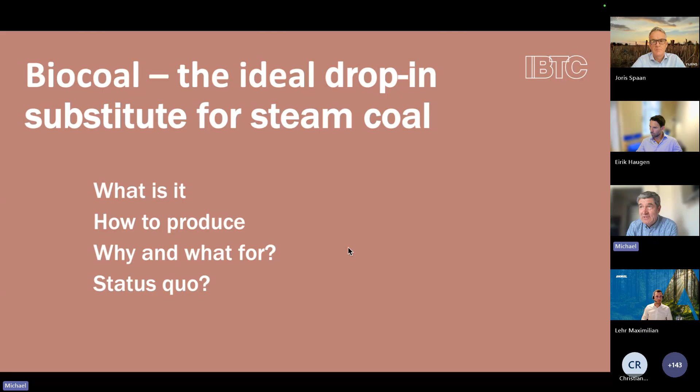For today, what am I going to talk about? I'm taking the role of introducing you briefly to what is biocoal, what is it made from, which processes do exist, what for can we use it, why are we building it, and then also give you a short update on the general status quo before handing over to some of our members. They represent then their individual approach to the market and their individual success stories already.

Now, what is it we are talking about? We all know coal is present, and coal is in reality made out of biomass. In many million of years, this is made. I mean, if we talk about peat, it's maybe only a couple of million years, but if you talk about lignite or subbituminous coal, we're talking about a couple of 100 millions, and anthracite takes about 400 million years.

Now, the overall clue in our technologies and our approaches is that we do the same thing, but much faster. We work in a couple of minutes, doing the full carbonization curve that usually biomass goes through under pressure and temperature when it's under the Earth. Along these process chains, we have a couple of process names.

Every time we are applying heat to the biomass, we not only eliminate the water content, but we also eliminate some of the volatiles content of the fresh and dry biomass.

As the first process step, we see steam explosion, which makes the lowest calorific value but still very high quality product. Only a small proportion of the volatiles is evaporated.

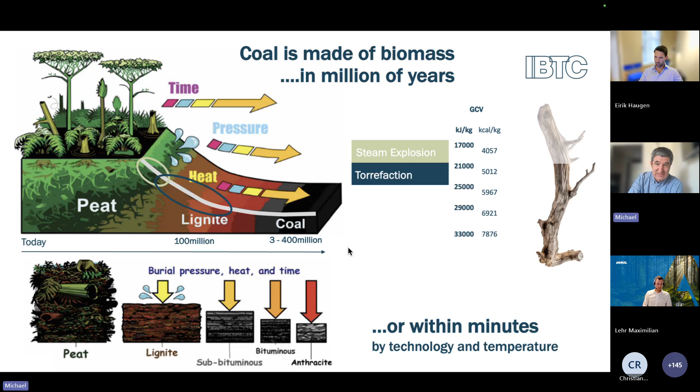And the higher we go in this process, we have further names: pyrolysis, carbonization, charring. These are all processes where more of the volatile matter in the biomass is evaporated, and the more the carbon is condensed, the higher the calorific value of the product, and the higher also the value of the product for other purposes than energy applications.

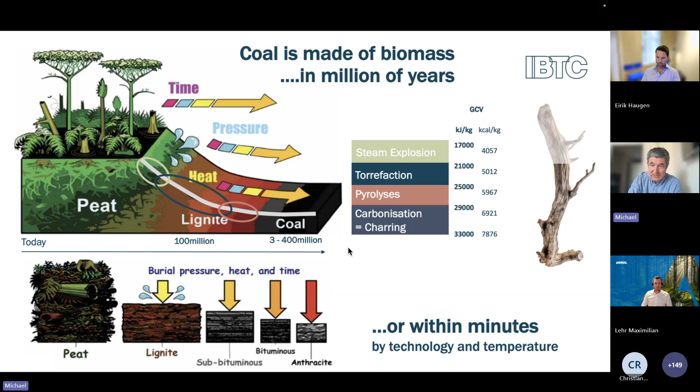Today, we are looking into the energy applications. We will have another webinar together with WBA on non-energy utilization of these materials, but here we are looking into thermal applications.

When starting to present these processes, especially in the financial community or other areas, I'm always asked, is this a mature technology already, or is this a novel thing? You may remember what brought us from Bronze Age to Iron Age—6,000 years ago, we developed charring processes, and we developed all the metallurgy out of those charring processes. So actually, there's hardly any technology or product with such a maturity and such a long-lasting success story.

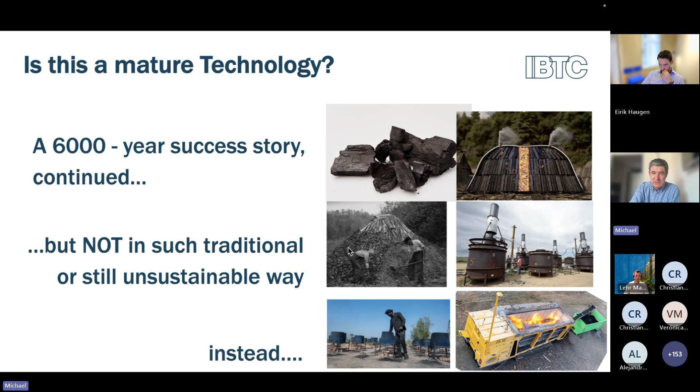However, what differentiates today's processes from previous ones? In previous processes, all the gases were just evaporated and emitted. That's a huge emission, a huge loss, but also a poisonous thing. So what differentiates us today from the past?

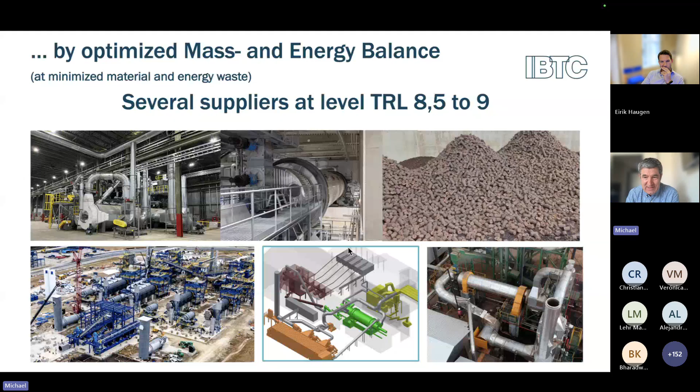What differentiates us from the past is that our installations are completely integrated, and no molecule is really wasted. We typically use all kinds of biomass feedstocks—we can use woody biomass, but also grasses, straws, shells, nutshells, or whatever.

Everything goes through an adjusted thermal process, then is upgraded, leading to products that, at the very end—after torrefaction or steam explosion—are fluffy matter that, for storage and transportation, needs to be agglomerated.

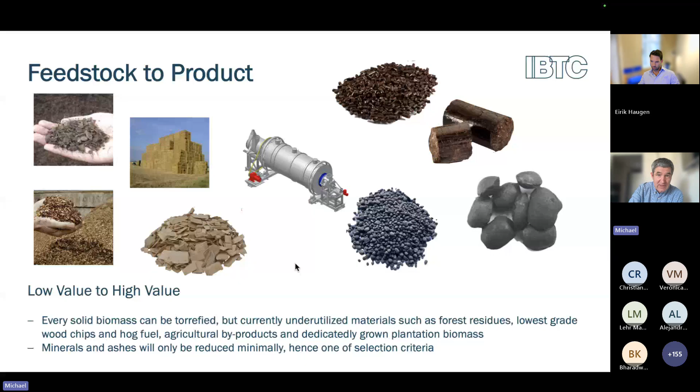We typically have a setup of a processing plant that is very similar to a standard pellet plant, where first you dry the biomass, whatever biomass it is, and then you go into a torrefaction reactor, which is the only difference from a pellet plant.

Here we have a superheater or super dryer that is typically operated at probably 200 to 300 degrees C, or a unit that does steam explosion activities, which you'll also be introduced to in parallel. However, out of this thermal treatment process, we get material that needs to be densified.

Is there only one way of applying heat to biomass? No, by far not—there are many different ways. As you can imagine, when you want to get your glass of water warm in your kitchen, you also have different means of applying heat—you can use the microwave, a cooking pan, or an oven.

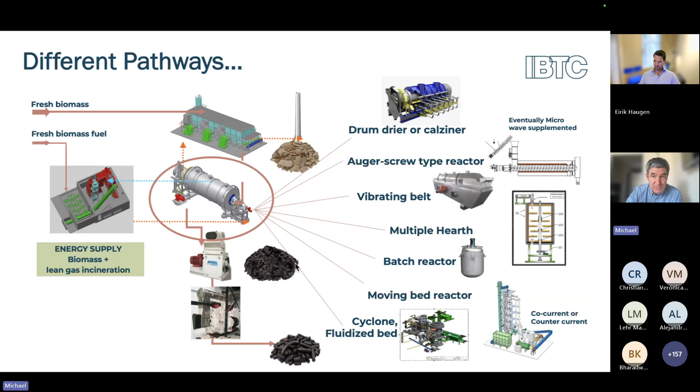So also here, in applying heat to biomass, we have all kinds of different technologies: rotary drums, auger screws, vibrating belts, multiple hearth reactors, some batch reactors, moving bed reactors, or circulating fluidized bed reactors. And we have steam explosion, with a separate line of machinery you'll be introduced to.

So what is the process level we are talking about here? We are talking, at the moment, in torrefaction about a process that applies heat to the biomass at about 250 to 320 degrees C, evaporating roughly 30% of the input dry mass in the form of syngas. This syngas is composed of carbon monoxide, hydrogen, and some long chain molecules, and it also contains energy.

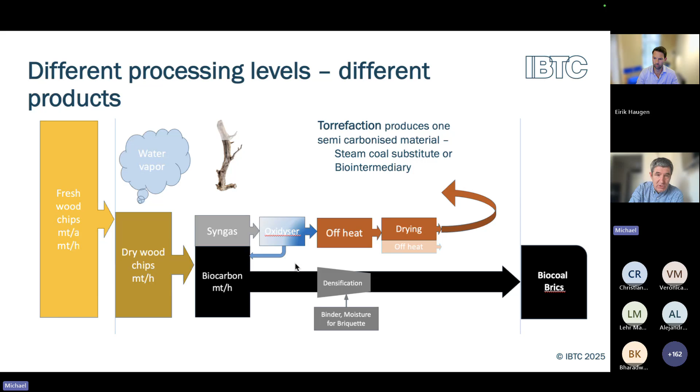In a typical torrefaction process, you would reduce your mass by about 30%, but only 15% of your original energy would end up as syngas. The best set point for a production line of torrefied material is when this becomes an autothermal process, meaning the syngases are combusted in an oxidizer, and this heat is used for the torrefaction process and for drying the raw biomass. That would be an ideal set point, and in such a set point, the mass and energy balance of a torrefaction plant is almost identical to a whitewood pellet plant.

What kind of products come from the carbonization and torrefaction processes? To clarify a little, we are speaking today about biocoal. Biocoal is a low devolatilization product. The calorific value is between 19 and 20 on dry basis, can go up to 23 probably also, and will have a fixed carbon of not more than 25%. The total carbon will be 60% or so.

This product is usually the ideal drop-in substitute for steam coal. So in power plants, the power plant digests biocoal as well as it digests normal coal. But this material is also the ideal input for all kinds of gasification processes, since it is so brittle that you can grind it up to talcum-like powder very easily. So then you ease the gasification, and by this also all the liquefaction afterwards.

If we go further up this curve, as you remember from the beginning of my presentation, we will end up with biochar or biocarbon materials that are used for sequestration of carbon or for other industrial purposes, like the decarbonization and defossilization of the metallurgical industry.

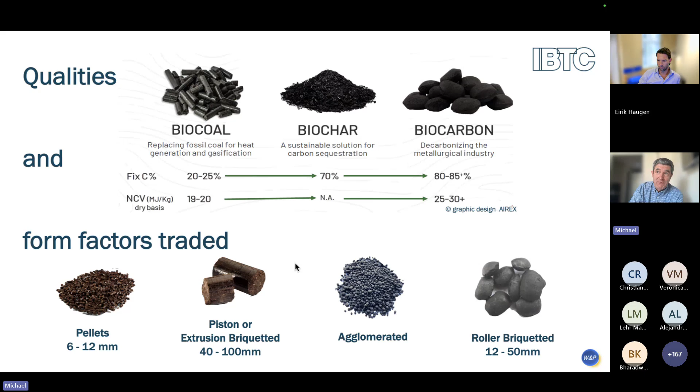We see roller briquettes, mostly for higher carbonized material, and especially for biochar, we sometimes see agglomerated materials, meaning snowball-like materials that don't have a very high bulk density. When we produce these products properly, in pellets or briquettes, we can reach bulk densities of about 720 to 750 kilograms per cubic meter, reducing shipping costs versus other biomasses significantly.

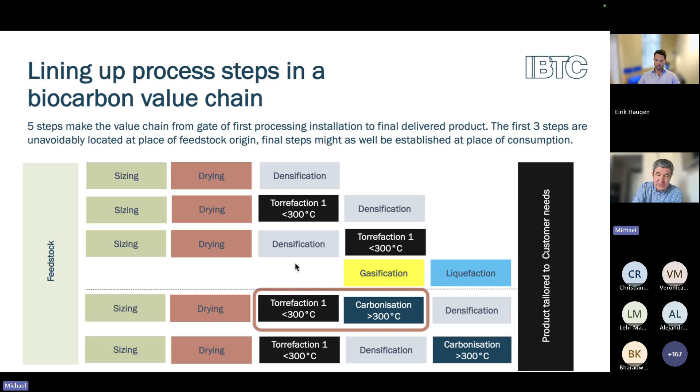I spoke before about the typical process setup, which is the same as a standard whitewood pellet plant: sizing, drying first, then thermal treatment, and then densification. There are now, especially in Asia, first projects that turn it around a little, doing densification first — so pelleting — and then torrefaction. Whatever the customer wants, the processor is willing to set up. Both have their pros and cons, which we can discuss later if of interest.

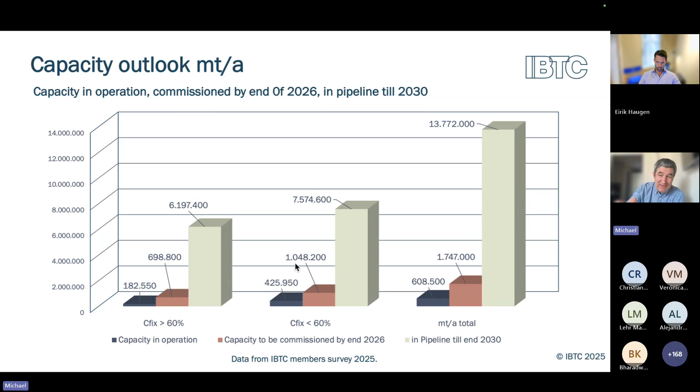This is just a survey from the members of the IBTC, so these numbers do not cover all the companies that are not organized in the IBTC. I need to admit there are a couple not yet organized with us. If you're present, please understand this as an invitation to join us.

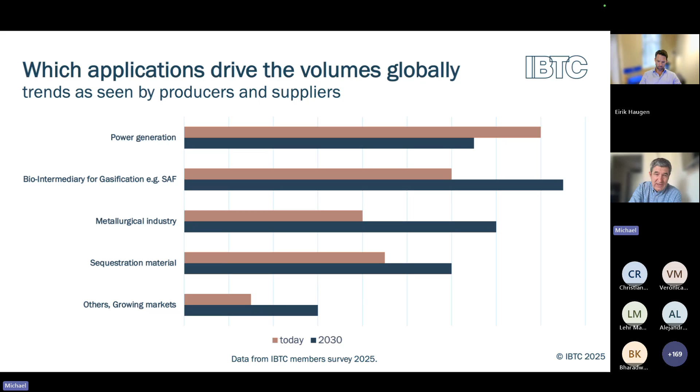The products will go mostly at the moment to the power generation sector, but we see more and more of these materials taken up as a bio-intermediary, as feedstock for further processing, like SAF production or further upgrading at a later stage. So torrefied material, steam exploded material, could be seen as a global commodity used as feedstock for all kinds of further processes, including power generation, but also more sophisticated processes that might supply the metallurgical industry, be used as sequestration material, and growing markets like anodes and further applications.

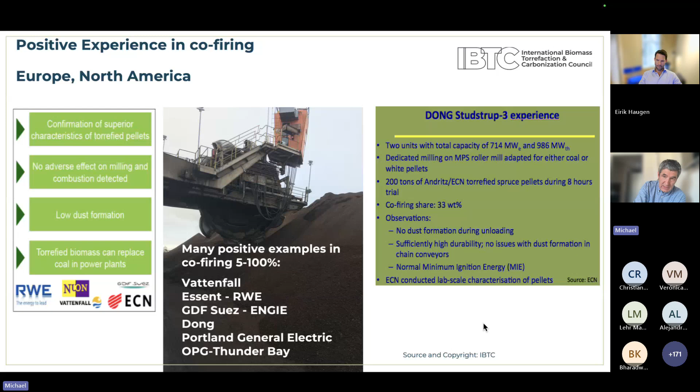Here are a couple of experiences which we had in the power industry. Started out actually in Europe, but then we had a couple of projects in North America, like Portland General Electric and OPG Thunder Bay. There is currently also a very large project in Canada announced: Belledune power plant will be converted to thermally treated pellets and upgraded.

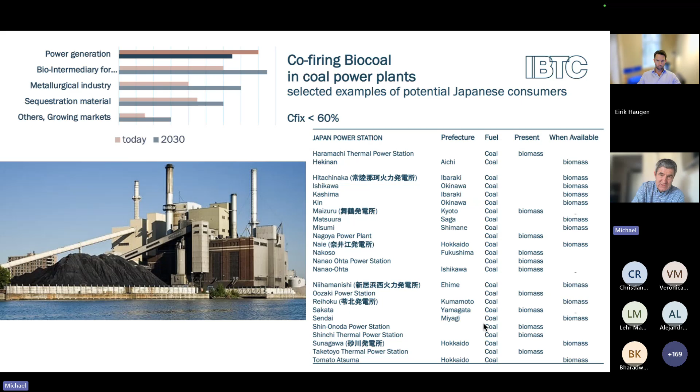And we see also that this is not only an effect in Europe and in North America. This is also very, very common by now already in Japan, where a lot of the coal power plants are using standard biomass for co-firing and are switching now step by step into torrefied biomass, because that simply eases their conversion process so significantly.

In conclusion, and to sum up here, our products are really known to the market, and this is a long success story of these products. We have in the last two decades established processes with a real optimized mass and energy balance, meaning there is minimized material and energy waste. Literally every molecule into the process is used in the process and creating some value through the process.

Circular biocarbon, biocoal is absolutely the easiest and cheapest way to substitute fossil coal, and not only in power applications, but in many other applications as well. So defossilization with biomass and with thermally treated biomass is significantly cheaper than ammonia, than hydrogen, or whatever pathway you would look into. While we have today mostly energy coal that we substitute, we are foreseeing that much more product will go into others, especially in the liquid and in the SAF market.

We know from the projects that are currently implemented that if there is a sustainable feedstock secured at reasonable costs, the projects that are implemented at the moment are really offering very appealing project IRRs. And the beauty of the situation at the moment is there is not only one technology producer, there's a couple of technology providers on the market in a very healthy and fruitful competition, leading to a number of different projects. Also for the consumers, the advantage is that they don't have to put all their eggs into one basket, but they can really diversify also their basis of supply.

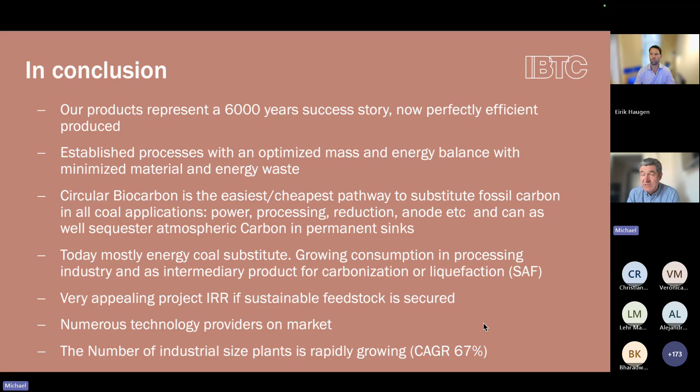As said, we foresee that the whole industry in biocoal will have a compound annual growth rate of somewhere between 60 and 70%, and by this will be one of the fastest industries growing at the moment.

But the question is now, what are actually the principles behind steam explosion and torrefaction? Michael explained it already, I will try to explain it also with slightly different words. Let's have a look behind the scenes at how the magic works.

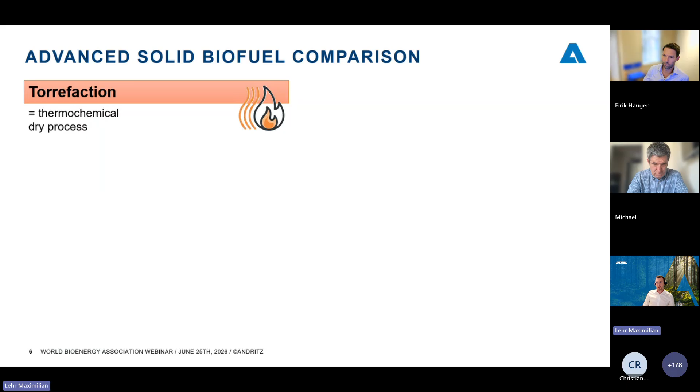I want to start with torrefaction. Torrefaction is a dry thermochemical process. This means lignocellulosic biomass is heated in an oxygen-free atmosphere to around 250 to 330 degrees Celsius. That causes the hemicelluloses and part of the lignin to decompose, releasing so-called torrgas. The resulting torrefied material has improved fuel characteristics, for example high calorific value and high fixed carbon content.

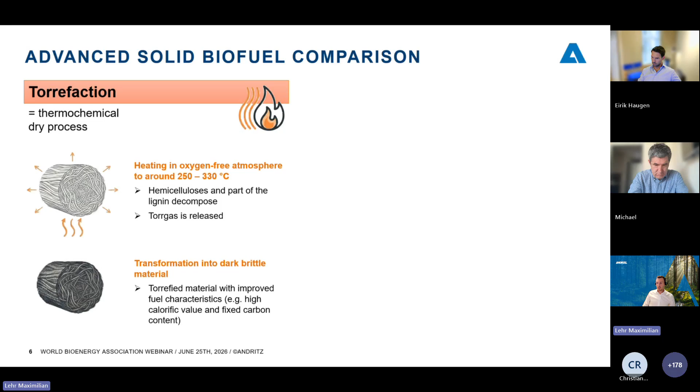Steam explosion, on the other hand, is a wet process - actually a wet mechanical, physical, thermochemical process. This means that the lignocellulosic biomass is heated up in a pressurized atmosphere with steam to around 200 to 215 degrees Celsius.

This leads to a partial conversion of the hemicelluloses into different degradation products like acetic acid and furfural. Lignin, on the other hand, is softened and partly melts. All the steam injected into the reactor condenses inside the capillary structure of the lignocellulosic biomass.

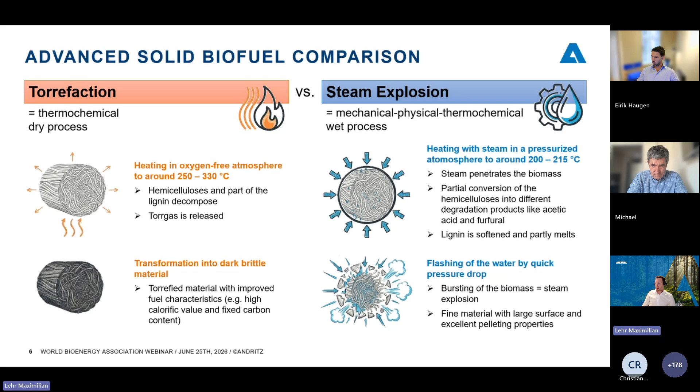After a certain retention time, the biomass is continuously discharged, and a quick pressure drop causes all the water inside this capillary structure to rapidly flash and expand, causing the lignocellulosic feedstock to burst, resulting in fine powder. The lignin is precipitated on this powder particle surface and acts as a binder during pelleting.

You may have already asked yourself, why do we as Andritz offer both steam explosion and torrefaction, and what's the better technology? Well, the unsatisfactory answer is: it depends, and it really depends on many factors.

As you can see with this table, there are various differences in the product properties between steam explosion pellets and torrefied material. For example, the calorific value, fixed carbon content, durability, pelleting properties, and so on.

To simplify it a bit, if you're just looking for a drop-in fuel for coal-fired heat and power plants, steam explosion might be the better technology, but for the steel and cement industry, you will need torrefied material because of the higher fixed carbon content.

Unfortunately, it's not that easy. There are also various project or site-specific parameters that can play a role. For example, you may already have a steam boiler on site, or have a demand for waste heat, and so on. So as you can imagine, for every project there is a different, better technology.

Our advantage as Andritz, since we offer both steam explosion and torrefaction, is that we are quite technology agnostic and always find the best solution for every project.

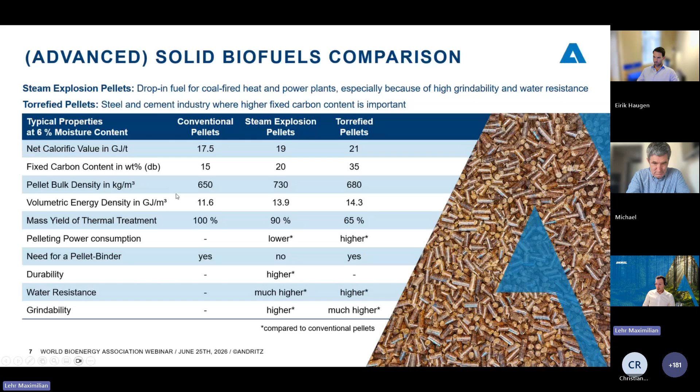This best solution can be, for example, simply pelleting to produce white or conventional pellets, or if you want to directly replace coal, steam explosion or torrefaction to produce advanced solid biofuels.

We as Andritz also look beyond advanced solid biofuels. Steam explosion powder or torrefied material can also be used as feedstock for gasification to produce syngas. This syngas then, as Michael already explained, serves as a platform for various syntheses to produce biochemicals and biofuels, for example sustainable aviation fuel.

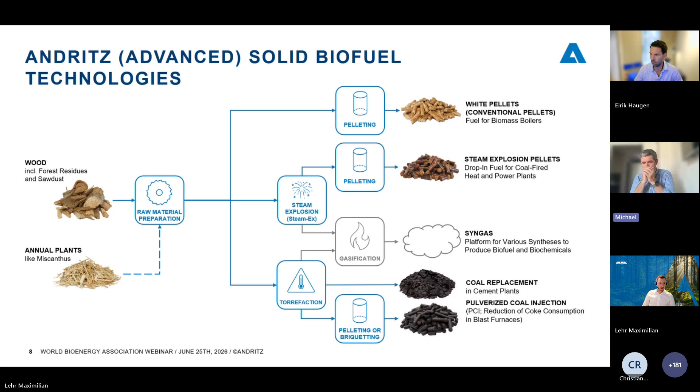But for this webinar today, I would like to focus on advanced solid biofuels. So the question is, how do these processes actually look in more detail? I'd like to start with steam explosion.

Our Andritz steam explosion technology, or Steam-Ex technology as we call it, starts with biomass handling and preparation. In the case of woody biomass, for example, debarking and chipping. Depending on the process parameters and options, the chipped biomass can also be hammer milled and optionally pre-dried before entering the Steam-Ex core process.

In this Steam-Ex core process, the lignocellulosic biomass is converted into steam explosion powder, as I already explained, and this powder is then pelleted into steam explosion pellets.

All the vapors or waste steam are condensed, cleaned, and purified in order to close the water loop and recycle all the water. Here we work together with Sulzer Chemtech, which allows us to efficiently treat the Steam-Ex vapors and close the water loop, and optionally also fractionate the resulting hemicellulose degradation products to utilize them as valuable biochemical byproducts, for example furfural and acetic acid.

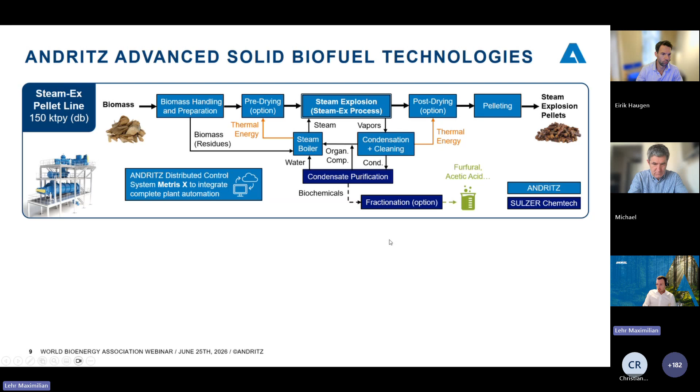The second advanced solid biofuel technology we have in our product portfolio is torrefaction. Similar to steam explosion, the first step is biomass handling and preparation. Woody biomass is debarked and chipped, but does not need to be hammer milled.

A key advantage of our torrefaction process is that waste wood can also be used as feedstock. In these cases, we can deliver the entire waste wood processing line using our Andritz recycling equipment.

After preparing the raw material, it is dried and then fed into our dedicated torrefaction reactor, where it is transformed into torrefied material. This torrefied material can then be further densified by briquetting or pelleting.

The resulting torrgas is utilized in our dedicated combustion chamber, and the resulting hot flue gas then provides thermal energy for the torrefaction reactor and the drying.

Since torrefaction usually generates more energy, more heat than it consumes, the surplus heat can be exported as hot water or steam when combined with a steam boiler.

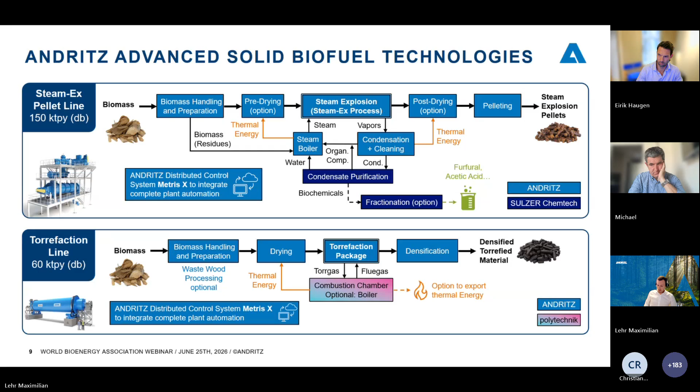Also, Airex is using our Andritz technology to produce advanced solid biofuels. Our pellet mill has been in operation already since 2016, continuously producing 2 tons of biocoal pellets per hour.

And we are continuing to develop advanced solid biofuel densification solutions alongside the front end, steam explosion, and torrefaction. This clearly shows that we are eager to take on any challenge to develop the right advanced solid biofuel solution to meet the market demand.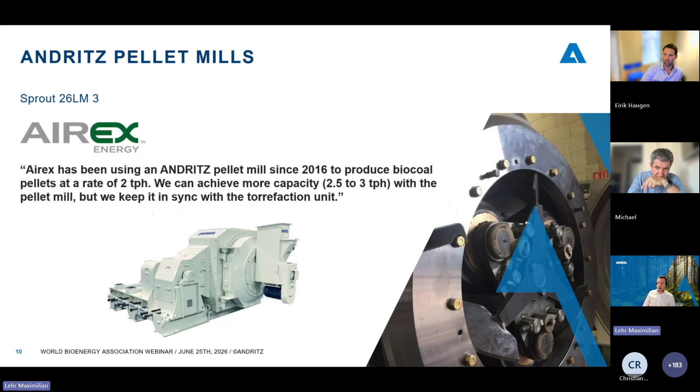That's actually the reason why we have focused on agricultural residues with our leaching process. I already presented the different pathways to produce solid and advanced solid biofuels from woody biomass and some annual plants.

Agricultural residues cannot be directly used to produce solid and advanced solid biofuels because their high ash and mineral content leads to severe issues like corrosion and wear during biofuel production, such as pelleting, and also slagging, fouling, and corrosion during combustion in industrial combustion systems.

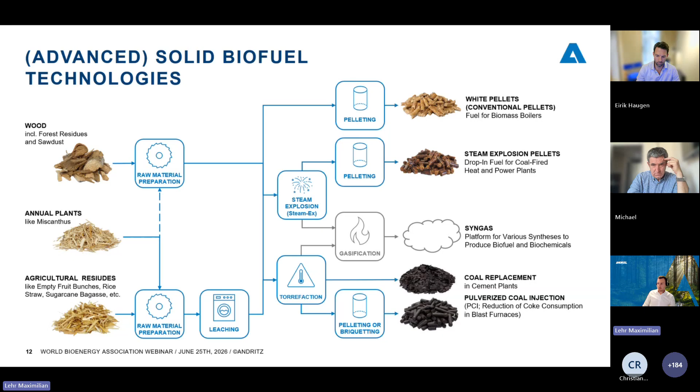With our leaching process, we can finally unlock the potential of agricultural residues by significantly reducing this high ash and mineral content. How does this work? Here you can see a schematic layout of our leaching process, which is basically based on our well-proven pulp and paper and environment and energy equipment.

Sand, stones and other heavy impurities like metal pieces are separated from the biomass, and all the soluble elements, for example potassium, sodium, and chloride, are extracted from the biomass.

The resulting wastewater, or leachate as we call it, containing all these minerals, can then be optionally treated to minimize water consumption and reduce wastewater production, and ensures it aligns perfectly with all the environmental legislation.

The resulting leached biomass is of course much less corrosive and less wear intensive, which especially ensures smoother pelleting, and of course we meet all the stringent biofuel specifications and ensure cleaner combustion.

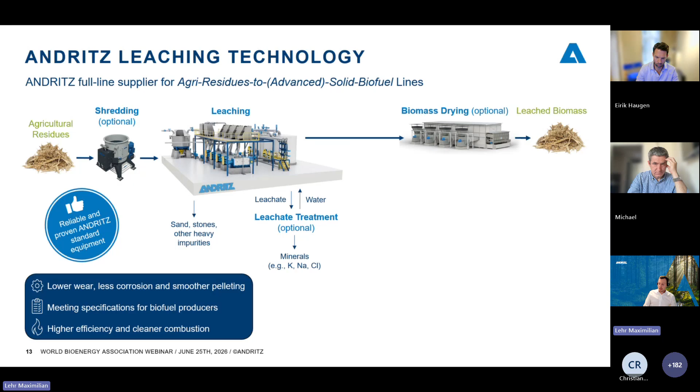Our leaching process can of course also be combined with our technologies for biomass drying and also steam explosion and torrefaction for complete lines to transform low-value agricultural residues into high-value advanced solid biofuels.

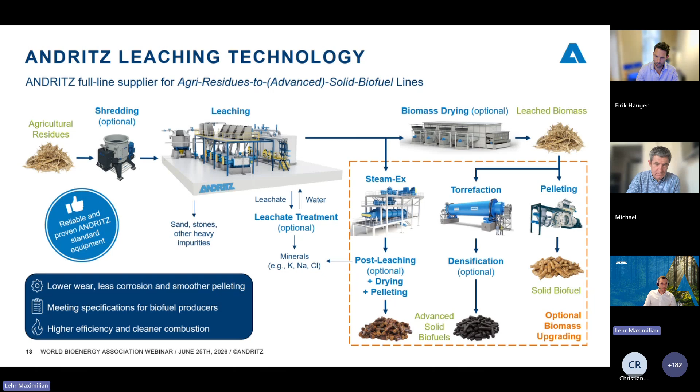And this is not just a concept I present you today, it is actually reality. With Andritz key equipment in the world's first commercial scale empty fruit bunch Steam-Ex pellet plant, powered by Rainbow Pellet in Malaysia, this plant consists of leaching and Steam-Ex technology and was designed as a multi-feedstock plant, able to use empty fruit bunches alongside other palm oil residues as well as wood.

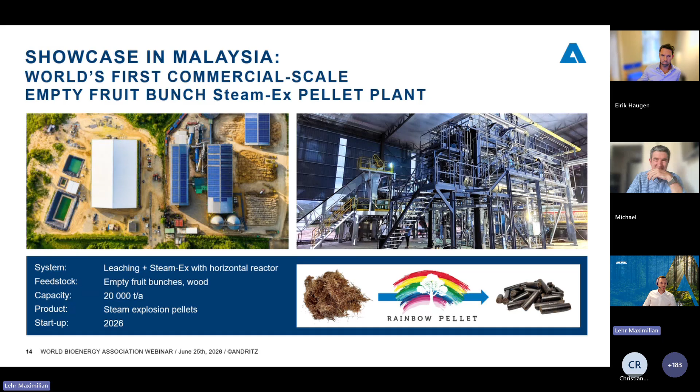We have successfully started up this plant just this spring, but please be aware this plant is just the beginning, so ladies and gentlemen, please stay tuned. But now I would like to thank you for your attention, and I'm already looking forward to your questions.

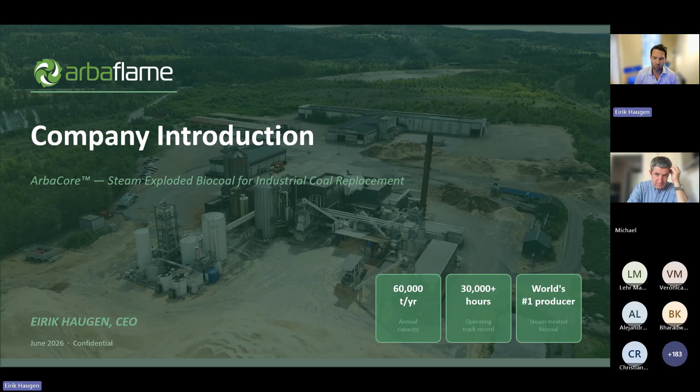Thank you, Michael, for the kind introduction, and to WBA and IBTC for facilitating the webinar. I'll give you a quick introduction to where we are at Arbaflame at the moment, as we now have close to 4 years of operational experience from our first commercial plant, Arbaflame in Norway. Before that, we also had a smaller scale pilot plant. So now we would say that we're definitely up to technology readiness level 9, and based on the long list of lessons learned we have, we are definitely at a stage where we can scale further.

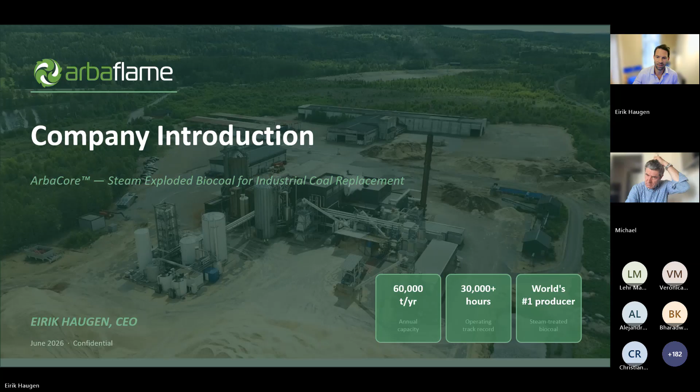We also, in our process from the condensates, produce other biochemicals, including furfural, biogas from the wastewater treatment, biomethanol, and acetone. So we actually regenerate about one-third of the energy in the process from byproducts.

In addition, last year we got Pearl Infrastructure Capital on board, which recognized that our technology has reached a point where we can go from small scale into a scale-up mode, and we are part of their second fund. We also now have a French sister in the portfolio, FICAP in France. So altogether, we have a total capacity of about 180,000 tons yearly.

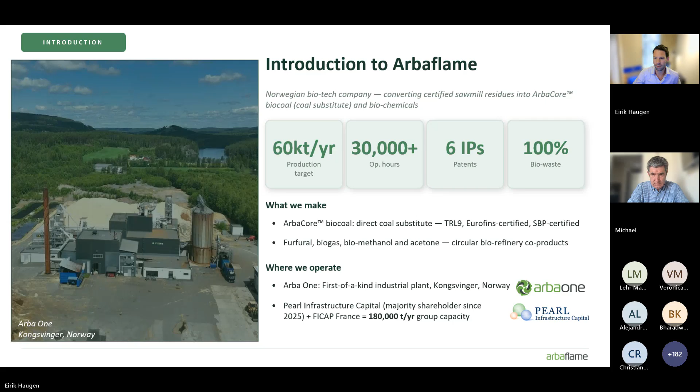Just a quick highlight of the market. The coal market is enormous, and the biocoal market, like Michael said, is not a new technology, but still biocoal production is in the early stages and yet scaling up quickly. The addressable market is enormous, and we're not trying to replace all coal in the world, definitely not. But really to target where it makes the most sense, where it's the most difficult to find alternative solutions, and where it's a direct drop-in substitute for coal.

So basically, it's not yet a commodity market. It requires qualification, and as we are operating in a highly conservative business, we often see, based on our 35 tests at various industrial sites in large scale, that from the first kind of little sample until full-scale operations, it's a long process.

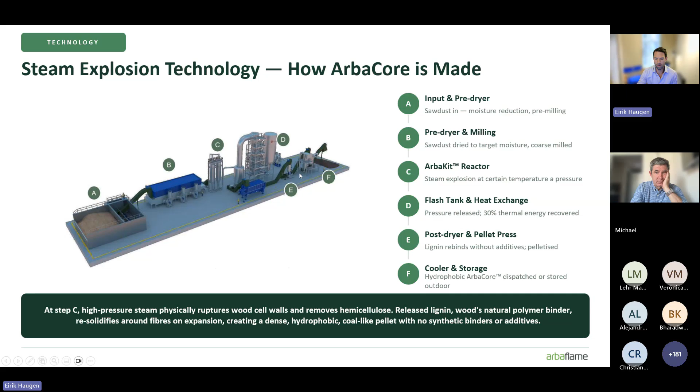So we pressure up to a certain level. We hold it for a number of minutes, and when we release the pressure in the reactor, that's when the magic happens, and the biomass defibrates and is blown into the flash tank where we separate the gas and the biomass. The gas is condensated and taken to our biorefinery, while the biomass is dried down to the right moisture level for pelletization and then off to market.

The product itself was originally designed for ultra-critical coal-fired power plants, so it's very fine particles. Bulk density of about 750 kilos per cubic meter, and calorific value of about 5.2. Moisture 8%. It's high on durability, and the particle size is extremely fine.

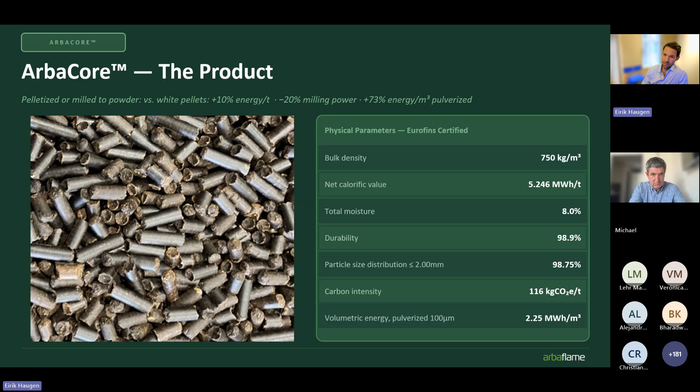So most of the use is intended for combustion as powder after milling. We see that due to the fine particle size, the volumetric energy in the powder is extremely high, about 70% higher than conventional white pellets.

When comparing against other alternatives, again, we are a drop-in replacement of coal. We're not really trying to compete with white pellets, where the investments in the required infrastructure is already made. But we have really mirrored the physical properties of coal, in a climate positive product.

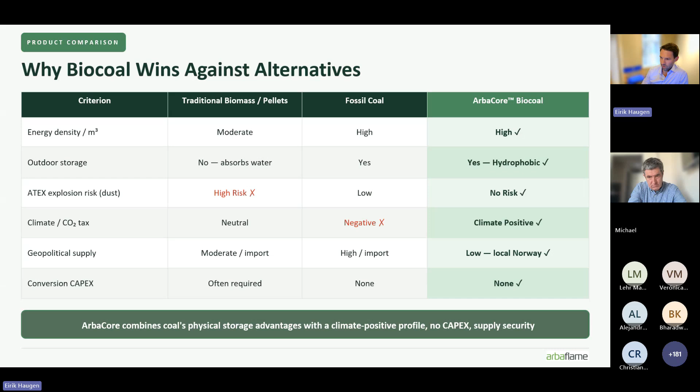Looking at our track record so far from Arba1, we've had close to 4 years of stable operation, and altogether we have produced around 250,000 tons of ArbaCore, and we have shipped off quite a few vessels. We're now actually close to about 1 vessel per month. It's not a very big number, but at least it's a pretty good start, and we've reached a maturity stage where we are really confident in how to do this at big scale and to really gain some proper volumes. We have a lot of experience with testing the product over time in our conservative business.

The traditional use of the product is within combustion, industrial thermal energy, typically in all types of industrial boilers, CHPs, different types of kilns that require high temperatures.

Going forward, we also see really high interest within fixed carbon, where you don't utilize the energy in the pellet, only the fixed carbon. And even though we don't have a high carbon material, we are still actually delivering quite a lot of volume to the metal industry, as we have a pretty good, stable, homogeneous product with about 20% fixed carbon that we can deliver in large shipments, bulk carriers.

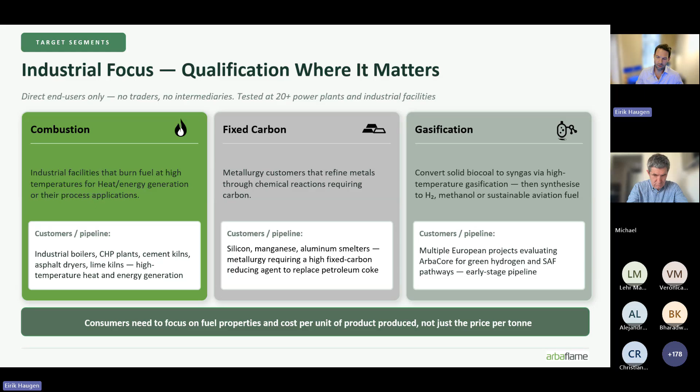And again, we're not trying to replace all types of coal use, but we really want to see the properties of the value chain, of the combustion setup of the industrial facility, and not just to kind of compare price per ton one-to-one with the alternatives. We have developed a solution, and we really want to find the optimal use of the product.

So, looking at our setup, our chain of logistics at Arba1, we have a storage facility where we hold 3,500 tons of Arbaflame. At the port of Oslo, we have a 10,000 ton bulk storage. And from port of Oslo is where we do the dry bulk shipments, typically from 3 to 10,000 tons shipments.

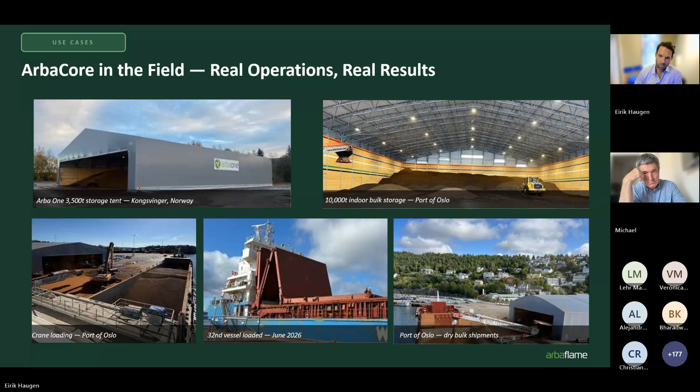We have done quite a few tests, campaigns, full scale, different blends. We have quite a lot of experience with storage and shipping. And obviously the hydrophobic properties, the low ATEX, and the lack of self-heating risk and low dust are kind of the key aspects.

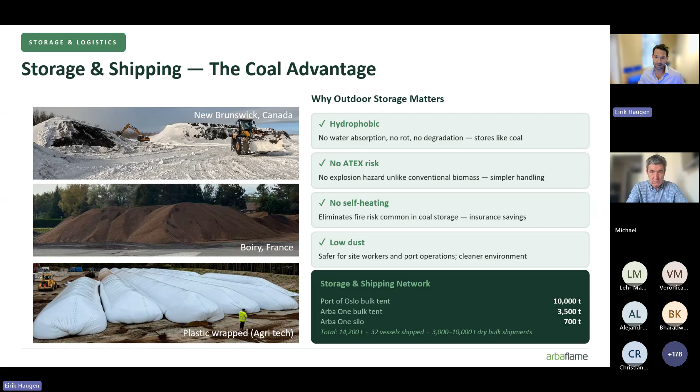Looking at the journey from the first sample being tested, there's a long process that typically takes up to 1 to 3 years. It's a quite slow time to market for the product, at least that's our experience. And naturally, the operations don't like to change too much, especially not when things are working.

So the typical process is to do small scale testing, milling tests, lab qualification testing. Then move on to the trial, where the size can be from a few trucks to a big vessel, to do different blends, typically starting low, going higher, to get the measurements on the emission data, the grindability, how the mix is operating in the mill, how the combustion stability is, and most importantly, the performance output of the product.

Then the next step is really to see, based on the trials, how you could optimize the existing equipment, how to fine-tune the parameters in the facility to get the most out of the product. Then, after going through that, that's really when you can sit down and talk about long-term offtake.

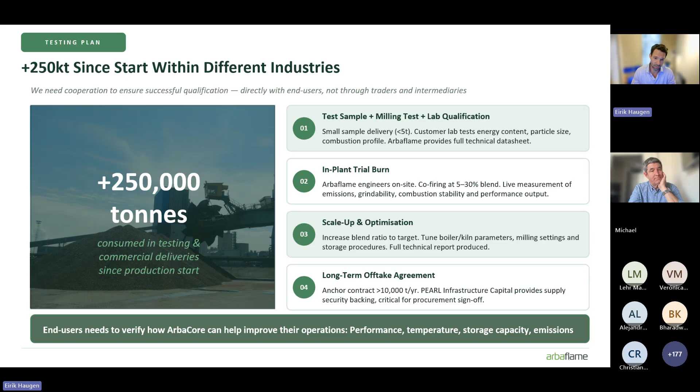On that note, we also are part of the SBP certification program. We want to ensure that all biocoal in Europe is following the highest standards of certification and sustainability. There are examples where uncertified biomass is entering the European market, and we really want to be at the forefront of ensuring that our small and yet growing industry maintains the highest standards when it comes to sustainability.

And it's no question about the compliance with the RED III requirements. And they're getting stricter, which is good. And it really is contributing to getting more accurate data on the emissions, on the traceability, and really the full life cycle assessment of the product.

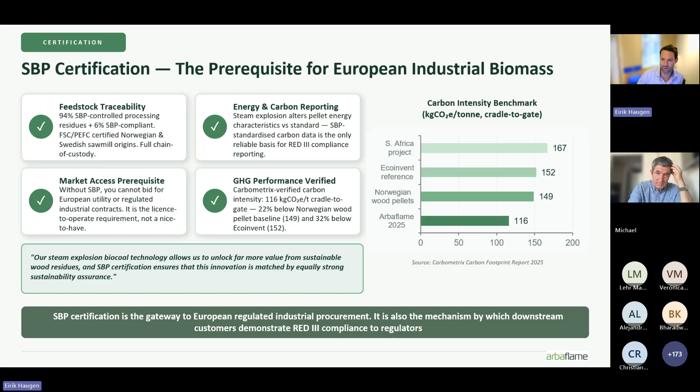Going forward, we now are at the stage where we are confident that we can use the lessons learned and experience we have from Arba One to scale up, basically using the same equipment and technology that we have today. So we don't plan to do any technology development.

We see that Finland is kind of leading when it comes to providing the best assessment and factors for our next plant. We see a good availability of sawdust. We see that it's regulative-wise an attractive market, and also with a lot of potential customers. So the main triggers for making the investment decision is really to have a solid long-term offtake agreement in place, and to have full confidence in the feedstock supply base.

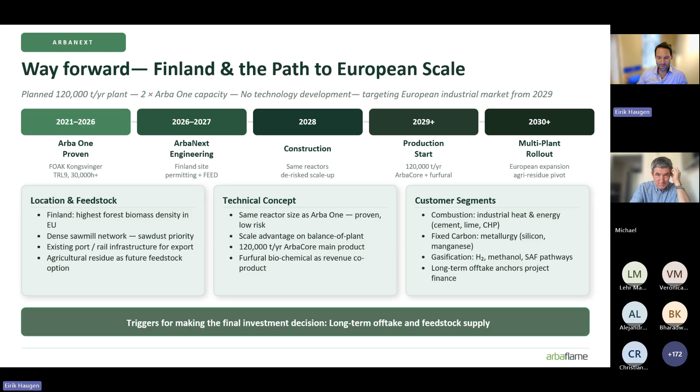So we are actively working on maturing the case, and hope to be able to progress that fast. That's the quick introduction to where we are in Arbaflame right now, and I'm happy to take some questions.

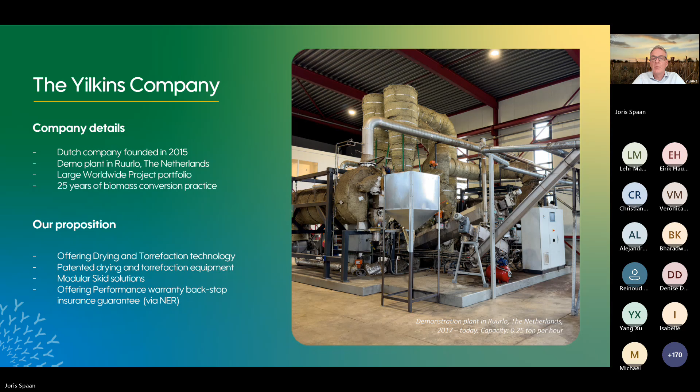It was already mentioned—and I think it's one of the most important parts of torrefaction technology in general, and also ours—that you are capable of handling different types of feedstocks. I'll show a glimpse of different feedstocks processed in our demonstration plant in Ruurlo, which has been in operation for the last 8 years. From the left side you see forest residues, sawdust, straw, bagasse, digestate, and one of the latest developments—an article we published recently in cooperation with Shell—using the organic waste fraction of municipal solid waste, torrefying it and producing nice pellets, as you can see on the bottom right.

So actually different types of feedstocks can be processed, torrefied, and densified at the end.

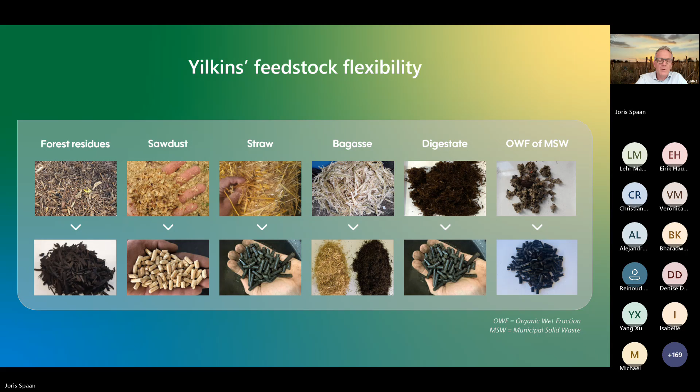Perhaps to start with the torrefaction. After the feedstock is dried to a moisture level below, let's say 10%, we start with the heating phase of the torrefaction. That is the first stage, the heating stage, where we heat the material to the desired torrefaction temperature. As Michael explained, this differs depending on the feedstock and is somewhere between 250 to 320 degrees.

After the material is heated to the desired temperature, it goes to the next stage of torrefaction. We call it a torrefier. In this stage, the material gets time to devolatilize and to create the product with the characteristics the client wants.

So having this two-stage approach in torrefaction, we can play with both process parameters available: temperature in the first step and time in the second stage. By applying those different process conditions in a good way, you can make a very good homogeneous product. That's important — no white spots left, totally torrefied. And you can do it with the highest efficiency, not losing a lot of carbon in your process to the volatile gases that come out, but keeping the carbon in the feedstock that finally goes to the client.

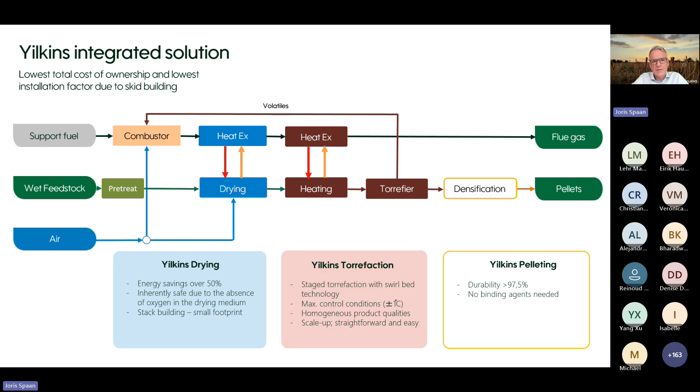I think it was mentioned before — it's also good to create confidence in the market and with our clients. How we did this in the past is by undergoing several successful due diligence processes, either with clients or with insurance companies, because we offer a performance warranty backstop insurance, as I mentioned. For instance, Markel, combined with New Energy Risk, did due diligence on our technology to be able to offer this insurance to our clients. We also had due diligence done by DNV, and a lot of different clients independently did their own due diligence looking at our technology. It's important to show the market that our process is efficient and reliable.

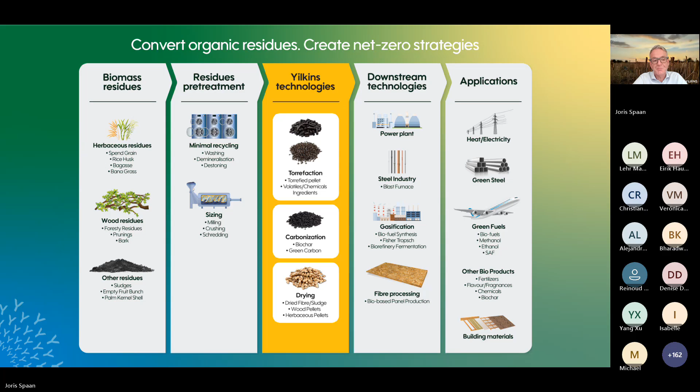So for the next step, green fuels, I'll use an example. We work together with ThyssenKrupp Uhde in Germany. We have a cooperation signed with them where Yilkins does the pre-treatment of the biomass and torrefies the material to make it very well grindable to be used in a gasifier as the next step. With this gasifier, syngas is produced. Syngas goes to the methanol plant, and with this methanol synthesis, biomethanol can be produced. This is an example of how fossil coal being used today can be replaced by biocoal.

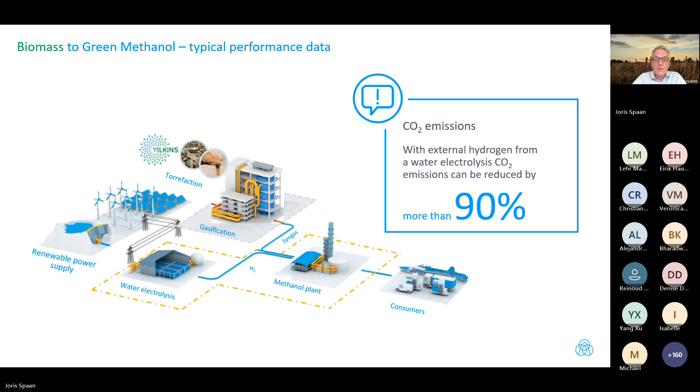The other example I have is this one: in the route from biomass to liquids, Yilkins is working closely together with Shell. We have signed a cooperation agreement there as well. As I explained, we focus on our core technology, torrefaction, and try to find partners in the market to offer total solutions to clients.

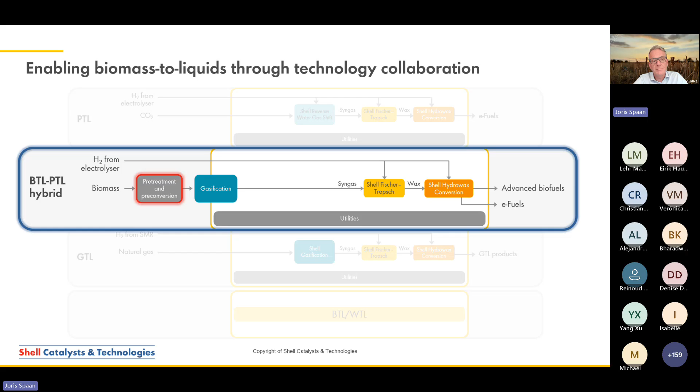In this way, the torrefaction step creates a homogeneous product out of different varieties of feedstocks, like grasses, woodies, digestates, whatever. Finally, you make a torrefied product out of it, and by milling you make a fine powder and create a homogeneous feedstock that can be fed to the gasifier. This is needed because you need to feed the gasifier with a high density product, and in this way you can replace the lignite, as Michael explained earlier, but also the coal-fed gasifiers that are in the world today. Another example of how regular steam coal can be replaced by biocoal to make green fuels.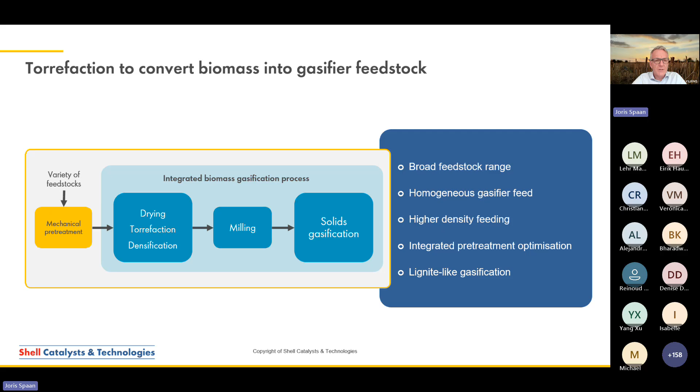Another step, and that is looking a little bit to the steel industry, or the metallurgical industry, to be more clear. We are also focusing here on our torrefaction and drying concepts. We work together with Tecnored, a company that is looking at decarbonization routes for the steel industry and has a lot of knowledge on the steel and metallurgical industry, on what the needs are to offer a drop-in feed to that industry.

If you look at the first three steps, what we are saying together with Tecnored is that you have to torrefy the material where the biomass is. So torrefy the biomass at its source. After torrefying and agglomeration or densification to make a black pellet, you bring the material to the steel plant, and then do the carbonization step on site to make the desired product as the steel plant wants. There you can mix it with other materials, and make a drop-in fuel that can be used for coke ovens and blast furnaces as well. So in this way, biocoal can be a drop-in fuel, also having a route towards the steel industry and creating green steel products.

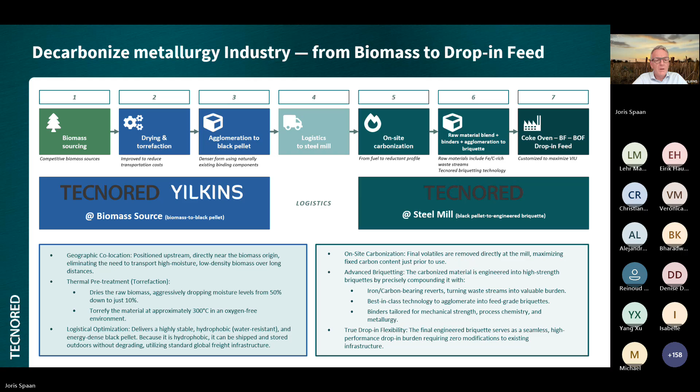Last but not least, to end with, it's not only theory, not only concepts, it's also practice. What I want to show you on the left side is the successful commissioning we had earlier this year in Tokuyama, Yamaguchi, in Japan. This client has installed a torrefaction plant on site with a capacity of roughly 1 ton an hour, to get hands-on experience with torrefaction, produce products, and do milling and testing at their site.

They are using palm residues from the palm industry as feedstock, and with this material they can produce a biocoal that is a substitute for the steam coal they are using today. They are using roughly 1.5 million tons, so this is the first step of many planned to replace the whole 1.5 million tons in total by 2035.

On the right side, you see a torrefaction plant being installed by Yilkins at Reliance, Jamnagar, in India. It's a large biorefinery site. They are using agricultural residues as feedstock from India, of course. This feedstock is being torrefied and offered as pre-dried material to our plant. So this is torrefaction only, what you see here.

The material is being torrefied with a capacity of roughly 4 tons an hour, and is being used as a replacement for the coal they are using today in their gasifiers to produce all kinds of chemical derivatives. This plant is a first step for many to follow for Reliance, because they have large ambitions, not only in replacing the existing coal for their gasifiers. The second step is that they are also looking at SAF and biomethanol, where biocoal can also be used to make these sustainable products.

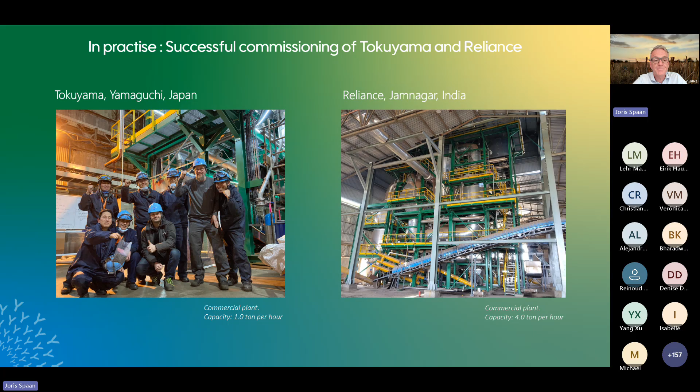By this last slide, I think I gave you a glimpse of what is happening, what Yilkins is doing, what Yilkins is offering to the markets, and how we can support different companies in different industries to decarbonize. So, let's get in touch. If you have questions, let me know.

And Michael, let me know if there are some questions that I need to answer right now. Thank you very much, Joris, for this. I noted in particular how much the people who installed your plant were smiling when they were opening it. So obviously there are nice things going on with this plant. Very happy to see this.

Thanks. Probably before we switch to questions, there are a couple of questions around all kinds of issues with the product, but not the technology itself. So permit me to make one general statement. With our technologies, we are upgrading biomass and aiming to substitute coal. All kinds of issues that are along the coal chain are literally also with our product. So if there are leaching issues with coal at an open coal yard, our biocoal might also have some requirement for treatment of leachate from coal yards and similar. So this is really a drop-in product for steam coal, and therefore has some of the similar problems.

We also had a couple of questions around feedstock flexibility. I think our speakers have addressed this very often and very clearly. Generally, all feedstock can be processed. It's just always a question of what the requirements and quality requirements from your clients are, and these need to be bridged, so feedstock specification meets client requirements. Literally, garbage in, garbage out is the usual equation for an industrial process.